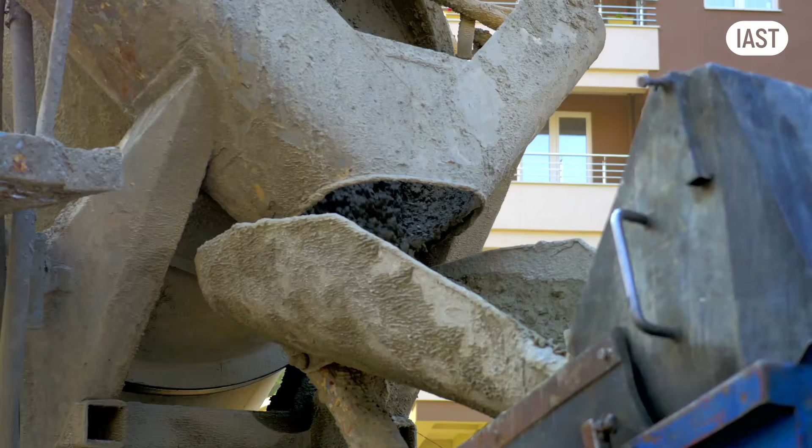What do Sydney Opera House, Soviet apartment blocks and Roman aqueducts have in common? They're all built with a technology that's been forgotten, vilified and reborn more times than any other building material in history. Today we are uncovering the remarkable story of precast concrete facades, a tale of innovation, disaster and ultimate redemption that spans over 2,000 years.

My name is Eugene Korch. I'm a practicing facade engineer and I teach facade engineering at the Institute for Architectural Science and Technology. Today we are diving deep into precast concrete facades, how they have shaped our cities, why they fell from grace, and how they are quietly revolutionizing modern construction.

Our story begins in ancient Rome with Opus Caementicium, the Roman concrete, the world's first hydraulic cement. The Romans didn't just invent concrete, they invented the idea that stone could be artificial, poured into any form and set into something stronger than nature provided. The Pantheon's massive dome stands as proof of concept. Built nearly 2,000 years ago, it demonstrated concrete's structural and sculptural potential. This marked the beginning of concrete's paradoxical history.

The same material would create both the most extravagant architectural forms and the most austere social housing. But here's what's fascinating: despite this early Roman invention, the technology was essentially lost for over 1,000 years.

In 1756, John Smeaton faced a challenge: rebuilding Eddystone lighthouse in conditions where traditional mortar would fail. His solution was hydraulic lime, what we now call Portland cement. This single innovation gave us the most widely used material in the world today.

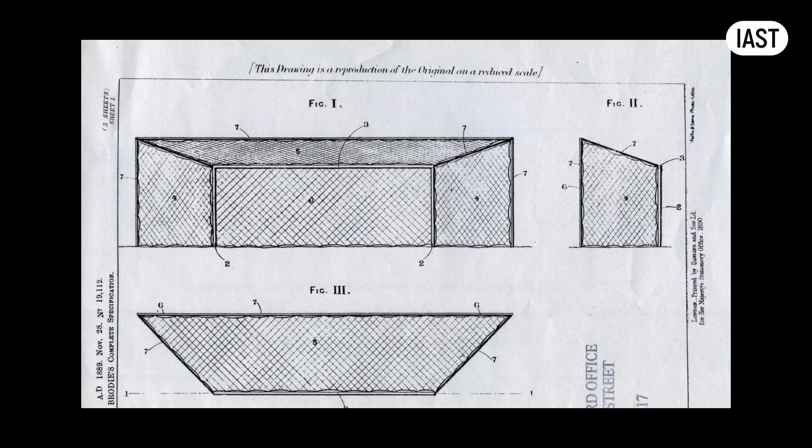In 1905, something remarkable happened in Liverpool. John Alexander Brodie, an engineer who also invented the football net, constructed the Eldon Street apartments using prefabricated concrete slabs. This was one of the first comprehensive precast concrete buildings in history. Think about that for a moment: the same mind that gave us the football net also pioneered industrial housing. Both solutions were so elegant, so obvious in hindsight, that we barely think about them today.

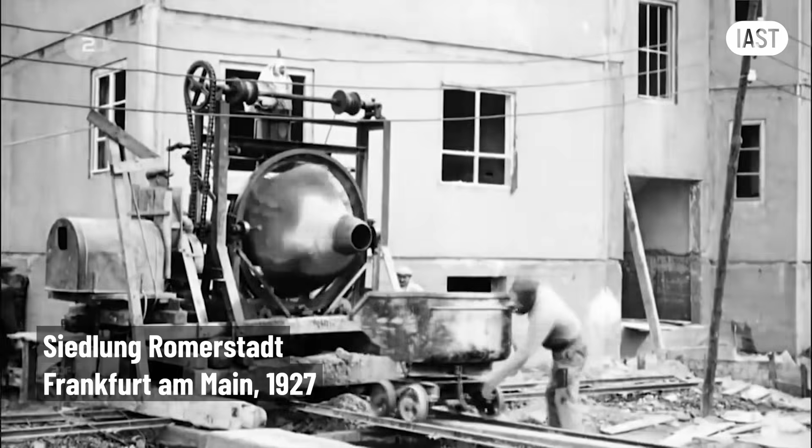Similar buildings began appearing across Western Europe in the 1920s. This footage from Frankfurt am Main in 1927 shows development by German architect Ernst May. Remember this name, we will have to come back to him later. All these early buildings used precast concrete as load-bearing external walls, following thousands of years of construction tradition where facades carried the building weight.

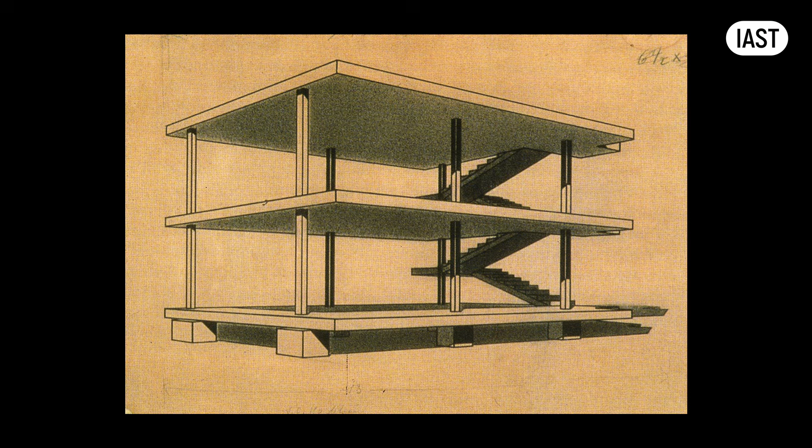Then came World War I, and everything changed. The in-situ reinforced concrete frame revolutionized construction. Suddenly, external walls didn't need to bear loads. They could be light, fast to install and decorative. In-situ concrete seemed quick enough. Curtain walls were the future.

Even modernist pioneers like Walter Gropius and Mies van der Rohe ignored precast entirely. Le Corbusier used precast only as an embellishment, balustrades, solar shading and decorative veneers. He embraced precast as a main material just once, much later in his career.

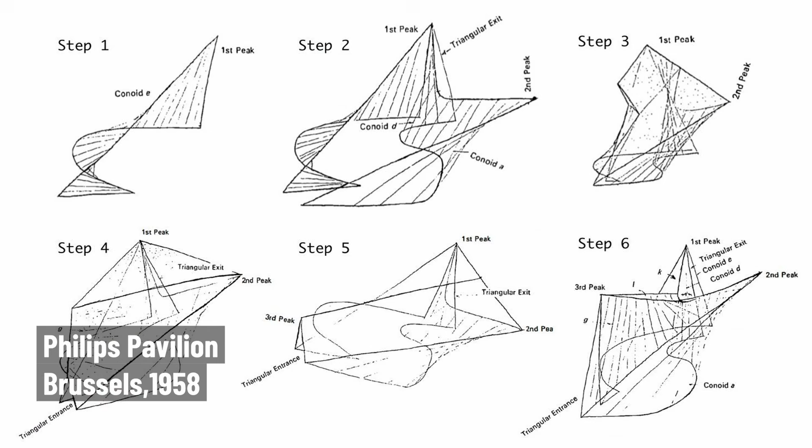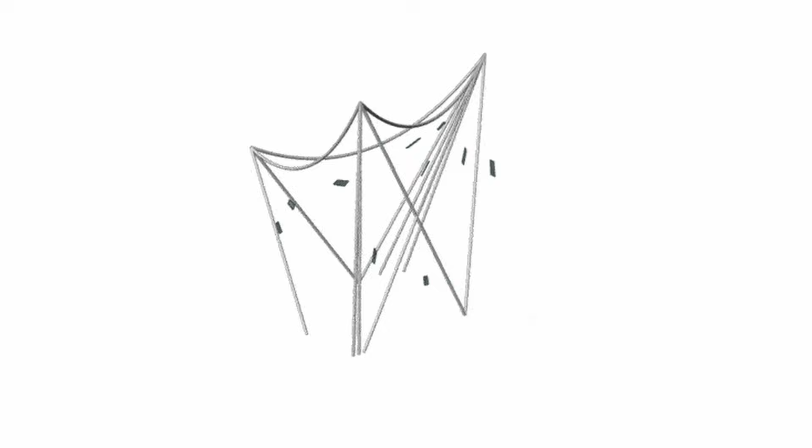The 1958 Philips Pavilion in Brussels, designed with Iannis Xenakis as a system of ruled surfaces creating large irregular geometries from single precast shapes. This pavilion's importance cannot be overstated. Built over 50 years before architectural computer-aided design or CAD, decades before parametric design tools, it achieved what we'd now call computational architecture using pure geometric thinking.

Ironically, the same year saw another precast revolution. In 1958, engineer Vitaly Lagutenko completed the first K7 block in the Soviet Union, the iconic Khrushchevka building. Nikita Khrushchev, the First Secretary of the Communist Party, had declared that every Soviet family deserved housing. The construction industry had 7 years to deliver 15 million homes. The challenges were the lack of skilled workers and time, and the solution was industrial-scale precast concrete production.

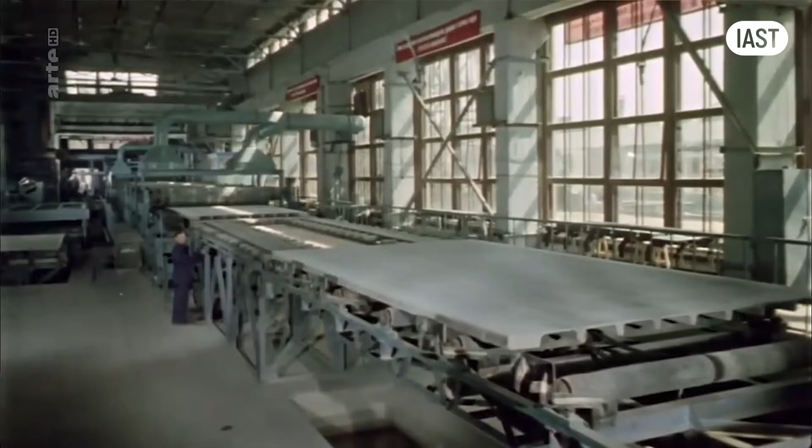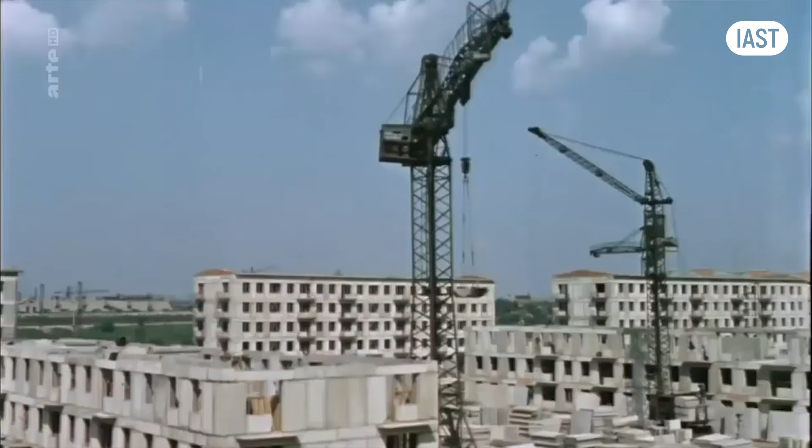Concrete panels shaped like waffles rolled off production lines resembling automotive assembly lines. Entire districts, complete with schools, kindergartens and cinemas, rose from these standardized components. As Khrushchev declared, we are not against beauty, we are against excessiveness. No decoration, no ornament, just pure industrial modernism. These concrete boxes sprouted across the Soviet Union and Eastern Bloc like architectural mushrooms.

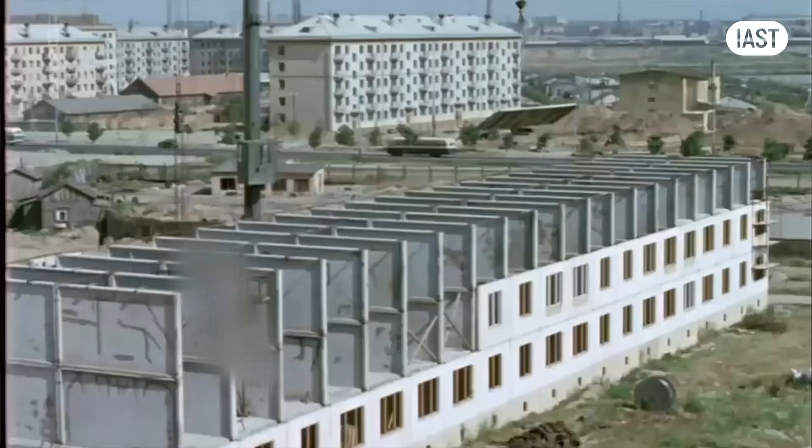The construction speed was breathtaking. Entire 5-story buildings erected in just 1 week, with complete fit-out finished in under a month.

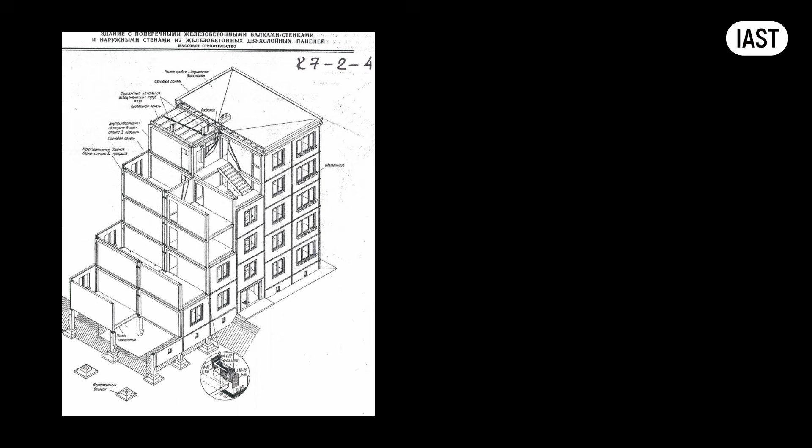When you build that fast, quality inevitably suffers. These buildings had no insulation. With winter temperatures hitting minus 30 degrees Celsius, residents called them concrete refrigerators. Acoustic performance was equally poor. Internal walls were just 60 to 80mm thick, enough for structure and fire safety, but not for privacy. In communist countries, privacy from neighbors or secret services wasn't exactly a priority.

Despite the quality issues, the housing crisis was solved. By the end of the Khrushchev era, 54 million people lived in prefabricated panel buildings. Imagine nearly the whole population of modern UK rehoused within just 11 years and 37 days, and he was still not happy about the speed. Of course, corners were cut.

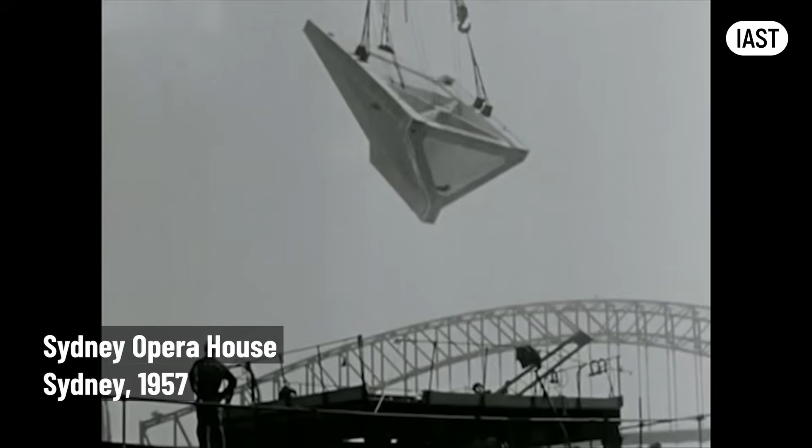Meanwhile, in 1957, Danish architect Jørgen Utzon employed precast concrete panels with cast-in tiles in the Sydney Opera House. Due to the building's complex geometry, and the fact construction began without complete working drawings, the project ran massively over budget and took a decade to complete.

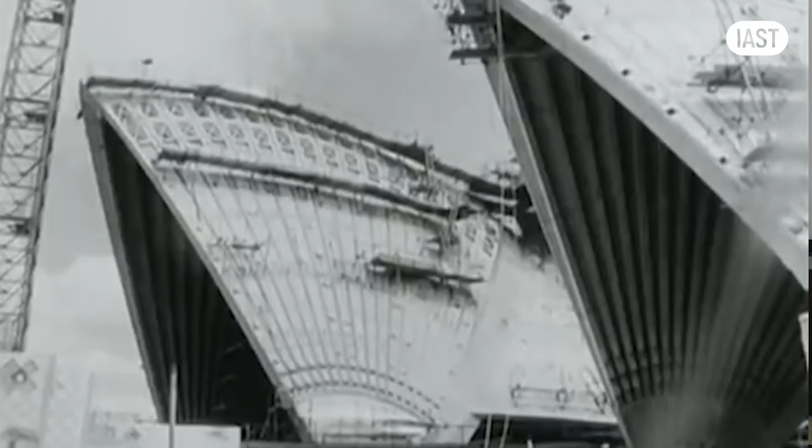Compare this to 15 million Soviet apartments built in the same time frame. Yet the results were stunning, one of the greatest architectural achievements of the modern era. Unlike the deteriorating panel buildings in Eastern Europe, the Opera House still looks modern and relevant today.

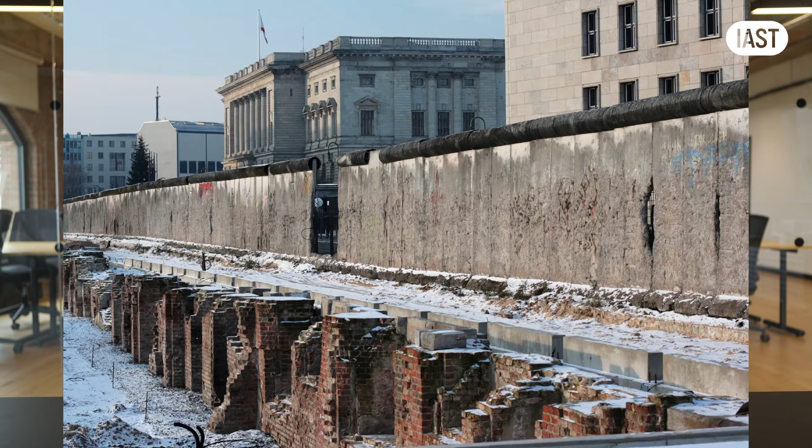Precast concrete became the solution for the housing crisis on both sides of the Iron Curtain. The Berlin Wall itself was largely precast concrete. Entire towns rose from precast panels, Marzahn near Berlin in the east, and Gartenstadt in Bremen in the west, designed by our old friend Ernst May. He would spend the next 2 decades designing thousands of prefabricated apartments in West Germany.

He nearly realized Le Corbusier's vision for Paris in Wiesbaden, proposing to demolish the historic old town and replace it with efficient modernist prefabricated boxes. Fortunately, residents opposed this plan. May believed standardized apartments would create new communities, but neighbors in these buildings rarely knew each other. The anonymity was so complete that these buildings became perfect safe houses for radical terrorist organizations.

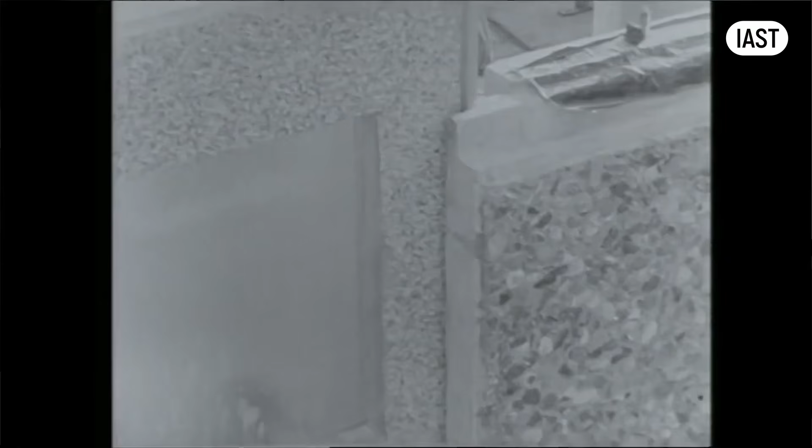Post-war Britain faced its own housing crisis. The government's answer was to increase building productivity through prefabrication. The only answer is more houses. The government are looking to increase the productivity in the building industry.

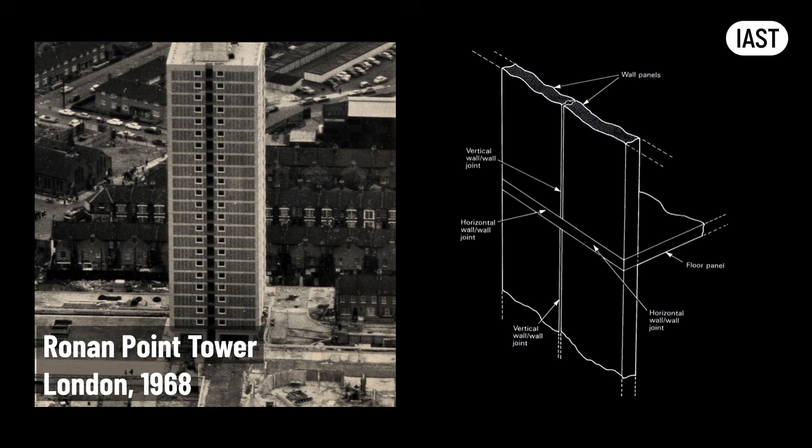Sounds familiar, right? The Ronan Point Tower, using the Large Panel System, or LPS, opened in March 1968. 2 months later, a gas explosion on the 18th floor blew out an external wall. The progressive collapse that followed killed 4 people and injured 17.

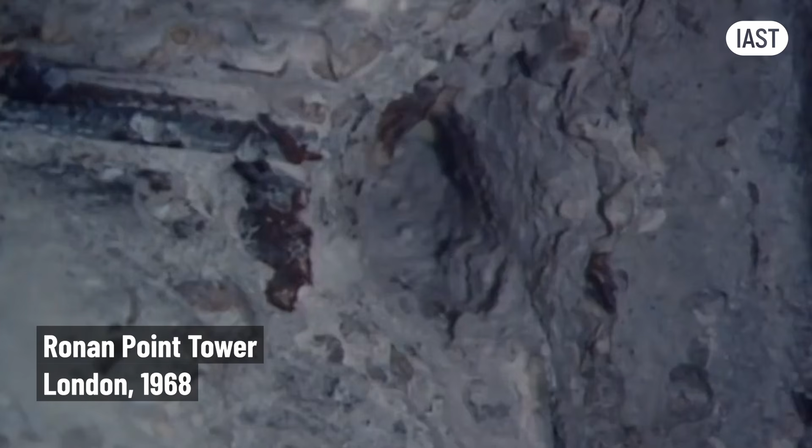An investigation revealed shocking workmanship failures. The engineers hacked back the concrete and found, in flat after flat, that the metal bars meant to hold the panels onto the building were just not there.

What proportion of bolts were missing and what proportion were put in? I would say about 80% were missing and about 20% put in.

Public confidence in load-bearing precast construction was destroyed. One resident's words captured the mood. If they offer you another flat, will you go in one? Oh, no, thank you very much. Anything like that anymore. Not that silly.

No, load-bearing precast was largely abandoned in UK housing, but it would return in a different form, as cladding material. But more on that later.

Early post-war housing prioritized speed and standardization over thermal performance. Those Soviet Khrushchevkas had no insulation, just bare concrete, earning them the nickname concrete refrigerators. By the early 1960s, Scandinavian engineers pioneered insulated sandwich panels. Mineral wool sandwiched between 2 concrete leaves marked a turning point in facade design.

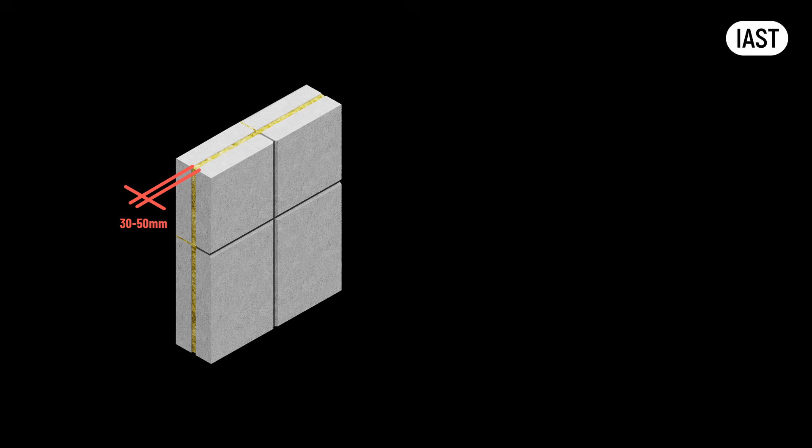The Soviet Union adopted similar approaches with mineral wool or expanded polystyrene. While the insulation thickness remained minimal, often just 30 to 50 millimeters, these early sandwich panels set the stage for modern energy-conscious systems. Today, precast sandwich panels feature minimum 150 millimeter insulation layers between structural and facing walls.

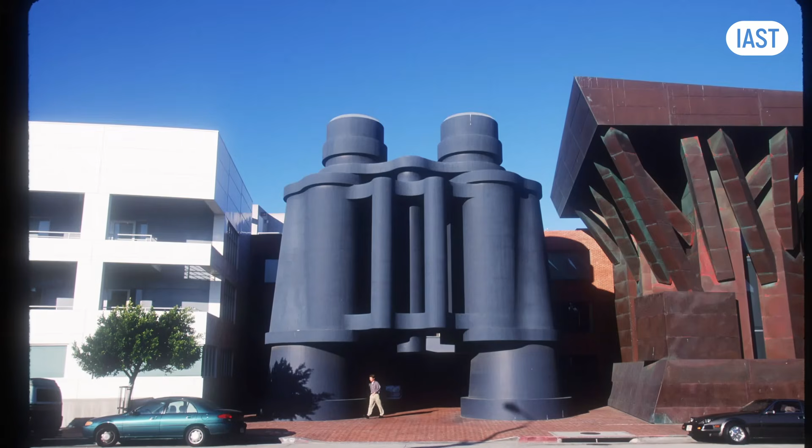The 1980s brought postmodernism. Precast concrete's ability to take any shape made it perfect for outlandish new designs. The best example is Ricardo Bofill's social housing in Paris, using the material associated with brutalism to create something entirely different. But Bofill wasn't using precast for speed or mass production, only for the complex shape it enabled. His buildings used an in-situ concrete structure, with precast panels inserted into frame apertures, creating decorative facades.

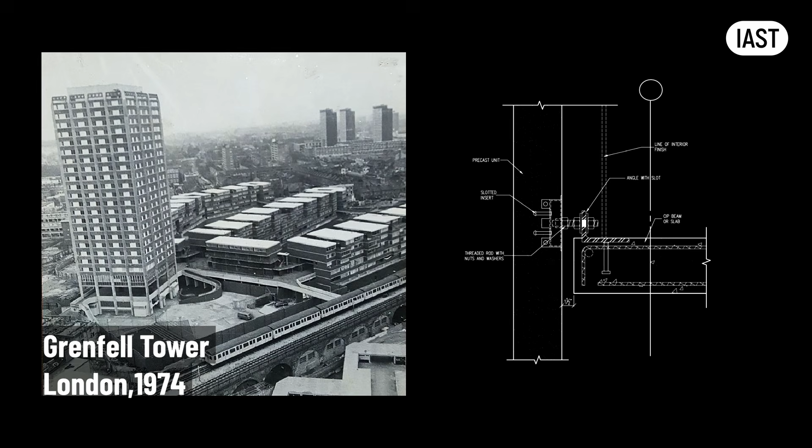This wasn't entirely new. Back in the UK, engineers had developed hybrid systems to address Ronan Point's progressive collapse issues, while offering more generous apartment layouts. The most famous example is Grenfell Tower, built with an in-situ reinforced concrete structure and precast concrete cladding panels.

These panels rested on the in-situ slabs with no thermal breaks. They were purely decorative, uninsulated. Once again, concrete served mainly as decoration.

Both modernist and postmodernist precast developments became associated with failed social programs. Those buildings in Paris became so synonymous with dystopia that they served as backdrops for films like Brazil and The Hunger Games. Low-quality housing made concrete blocks synonymous with mass-produced mediocrity. Exuberant postmodernist ornamentation hardly helped with this reputation.

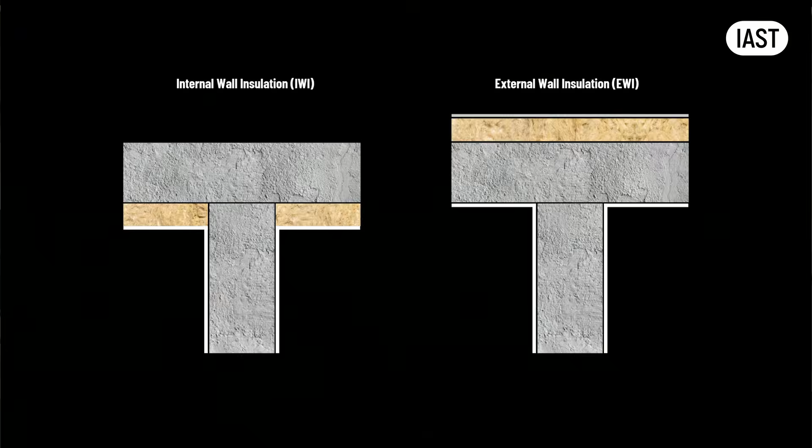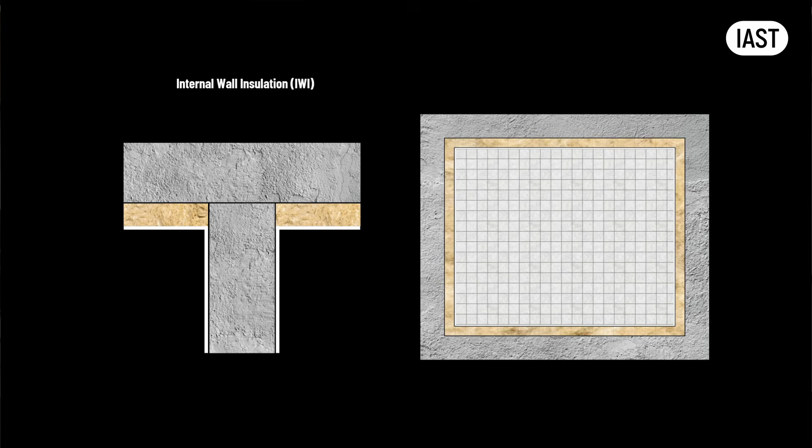When the time came to address thermal performance issues in existing precast buildings, the industry faced two choices: internal or external insulation. Internal insulation would intrude on residents' living space and create interstitial condensation problems. Installing insulation internally without decanting the apartments is hardly possible, and the apartments themselves will end up slightly smaller, as the insulation eats into the existing space.

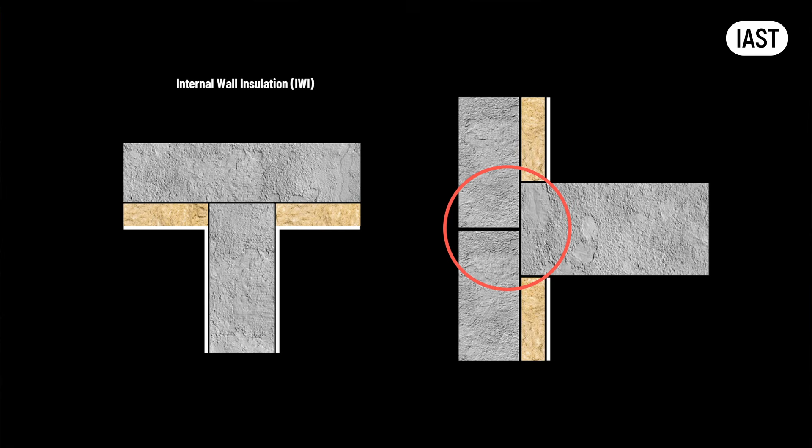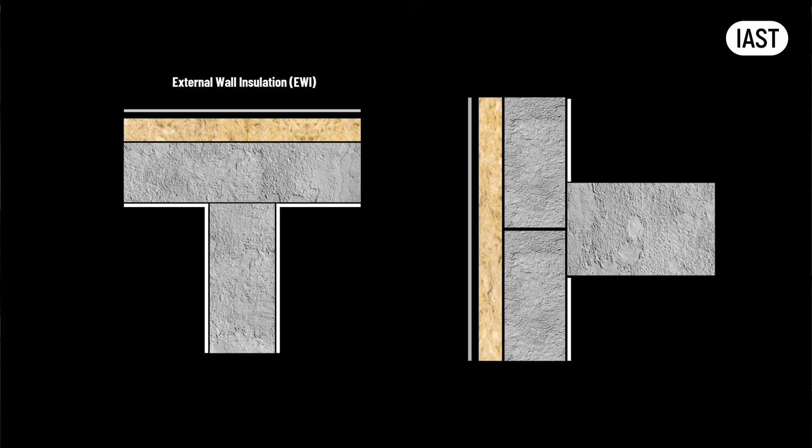Worse still, thermal bridges at the slab-to-panel connections would remain unresolved at these locations. External insulation proved far more effective, wrapping the building in insulation and rain screen cladding with ventilated cavities to manage moisture. It was also less intrusive for residents. As exposed concrete towers fell from grace, architects were happy to cover what many saw as ugly, soulless concrete.

This is exactly what happened at Grenfell Tower from 2014 to 2016. To save money, designers chose combustible aluminium composite cladding, or ACM, insulated with high-performance insulation that was also combustible. Just over a year after completion, 72 people lost their lives in the resulting fire.

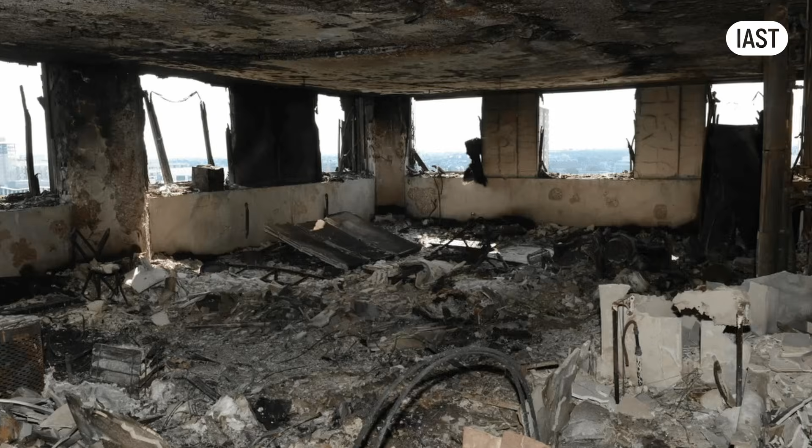The morning after the Grenfell fire, only the precast concrete structure remained intact, stained but undamaged, while the cladding and insulation had completely burned away. The industry was forced to give precast concrete another chance.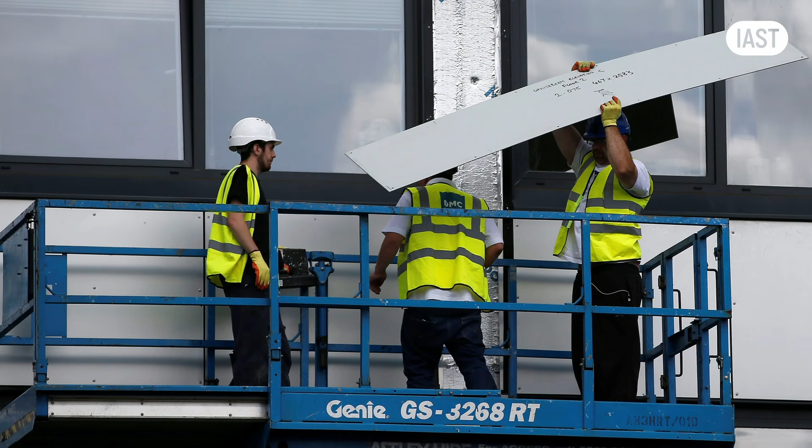The mass housing era seemed over. Residents demanded larger apartments with flexible layouts that exceeded what Khrushchevkas could offer. But developers still wanted prefabrication's speed and cost efficiency. Post-Grenfell, rain-screen facades fell from grace, and metal panel cladding became associated with cheap, low-quality construction.

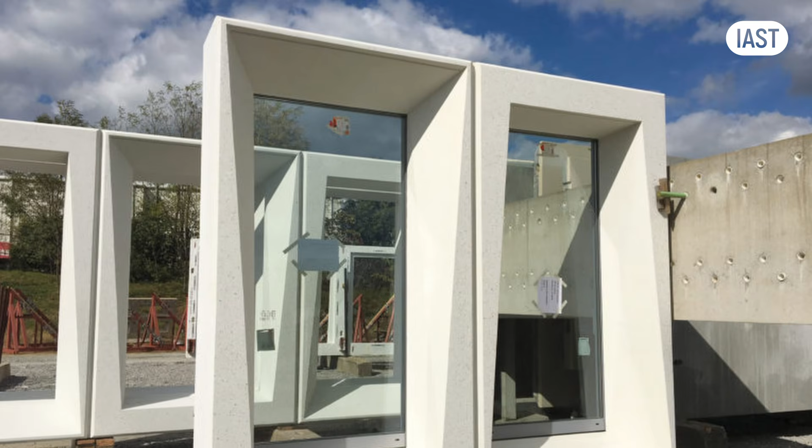Precast concrete facades found new fashion in so-called window panel systems. The primary structure remained in-situ reinforced concrete, but facades are prefabricated off-site with windows pre-installed in the openings and craned into position.

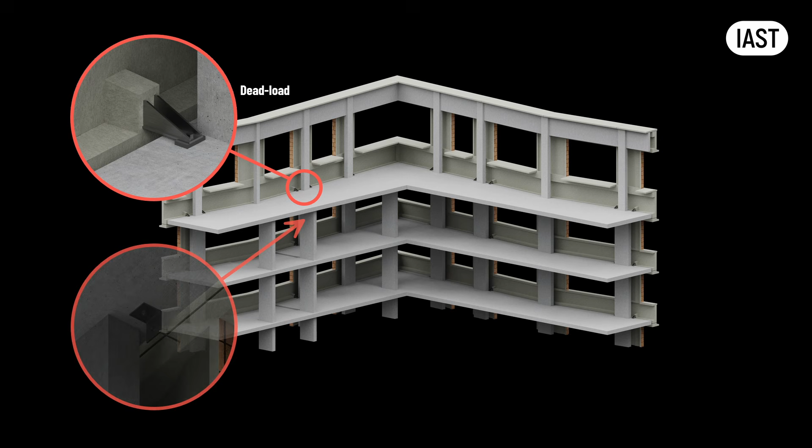This time, panels connected to the slabs through stainless steel brackets or hung from the columns and shear walls. The most common installation strategy is two stainless steel brackets at the bottom of the panel, transferring the dead load to the slab, with two or more lateral brackets with vertical slots at the top of the panel, transferring the wind load back to the slabs or columns, while allowing the panel to accommodate deflection and movement of the primary framework of the building.

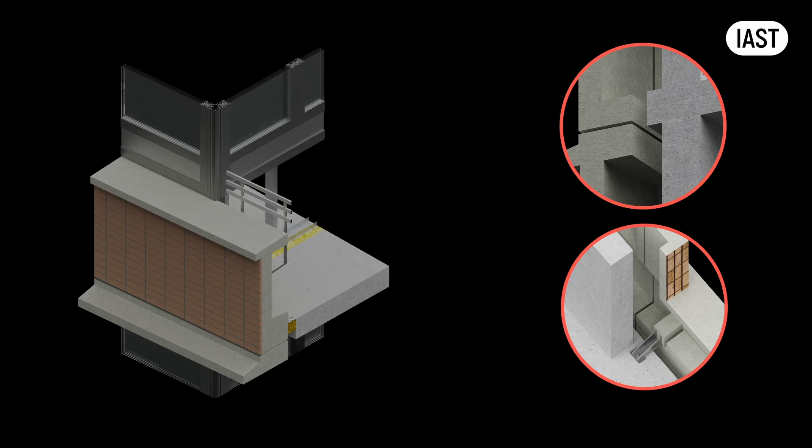Gaps between the slabs and panels serve as thermal breaks, eliminating notorious thermal bridges. The gap between the slab and the panel is also needed for installation tolerances, and is filled with compressed mineral wool fire stops, preventing flame and smoke propagation.

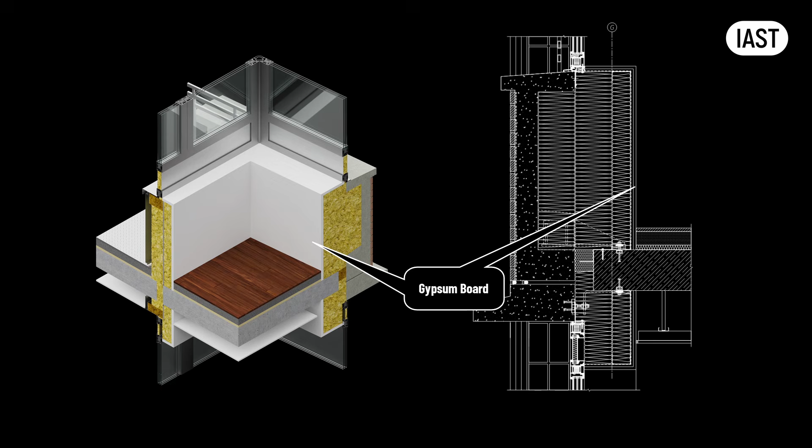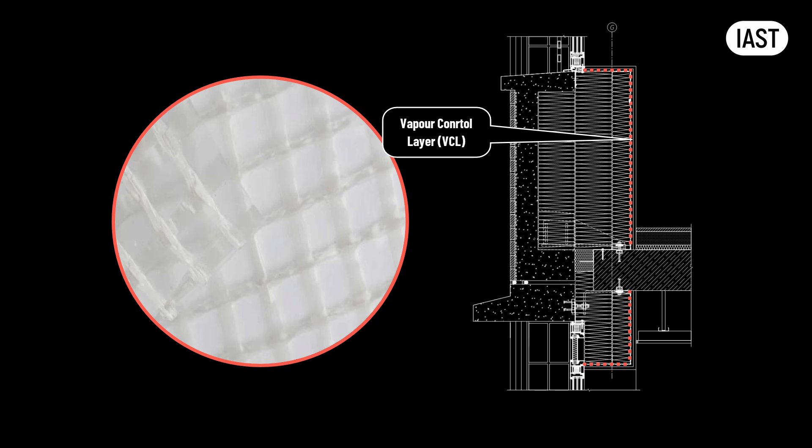Mineral wool insulation is installed behind panels and covered with stud walls and painted gypsum boards. Smart vapor control membranes, positioned between the stud walls and the gypsum boards, respond to relative humidity, normally vapor closed but opening when relative humidity levels rise, allowing trapped vapor to escape. This addressed the interstitial condensation issues that plagued earlier systems.

External concrete panels are at least 150 mm thick, with about 200 mm mineral wool insulation behind them, covered in at least 12 mm gypsum boards. They offer fantastic sound insulation.

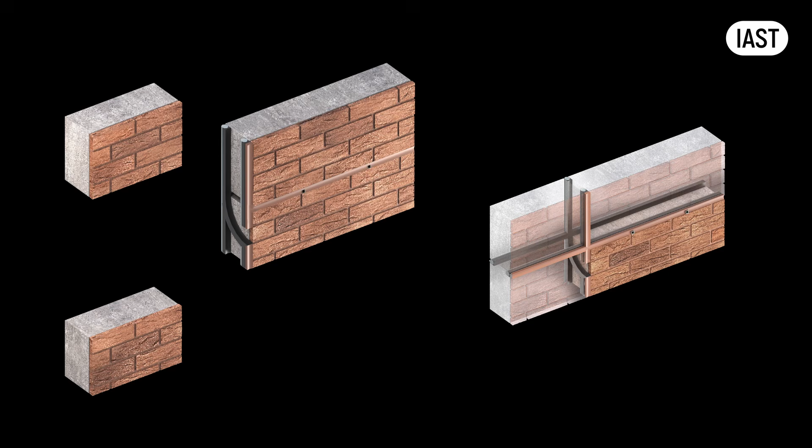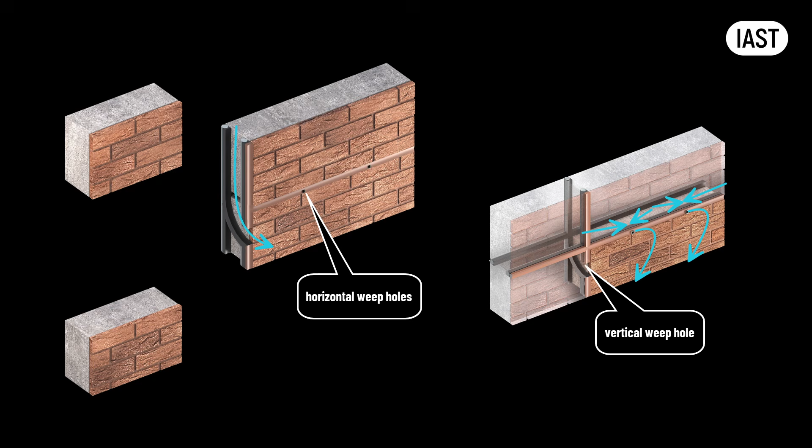The joints between the panels adopt a two-stage seal strategy similar to curtain walls. But unlike curtain wall facades, the seals are executed with silicone rather than rubber gaskets. There are weep holes in the outer silicone seal, either vertical or horizontal, allowing any moisture to escape, with the inner seal serving as the ultimate water and air barrier.

Precast has yet another superpower up its sleeve, which enabled its widespread adoption in recent decades: other materials can be cast into its surface. With skilled labor shortages now critical, precast concrete addresses this challenge elegantly.

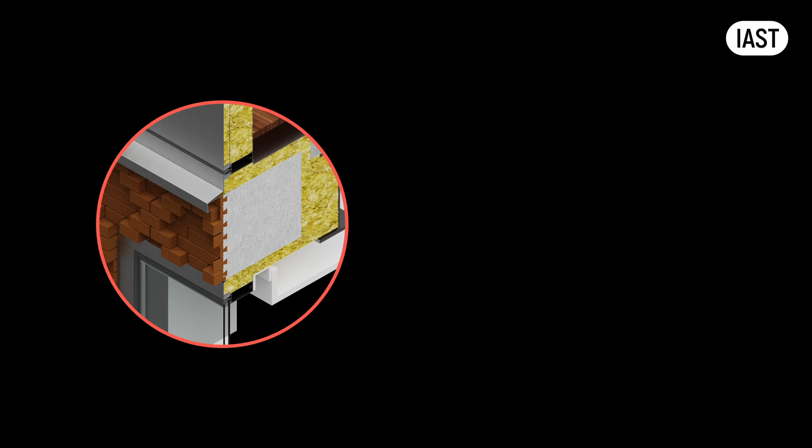Thin brick slips with dovetail keys at the back can be cast into panel surfaces off-site, enabling high-rise brick buildings at speed and cost impossible with traditional masonry. This method also liberates designers from traditional brick bonding constraints. Since bricks aren't stacked but cast into surfaces, virtually any pattern becomes possible at no additional cost.

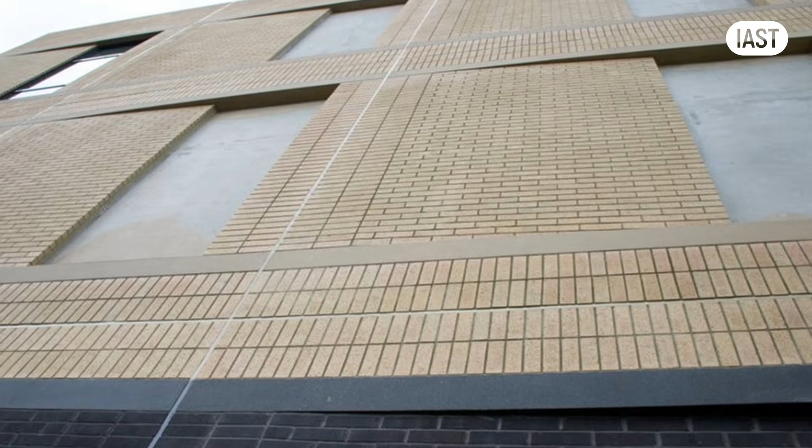Stone and terracotta are equally popular choices, creating buildings that appear traditionally crafted while being industrially produced. The only giveaway of these facades' panelized nature are the joints between panels. These panels reach up to 12 meters in length and at least 1 floor in height, only limited by the size of the lorry or truck that can deliver them to site.

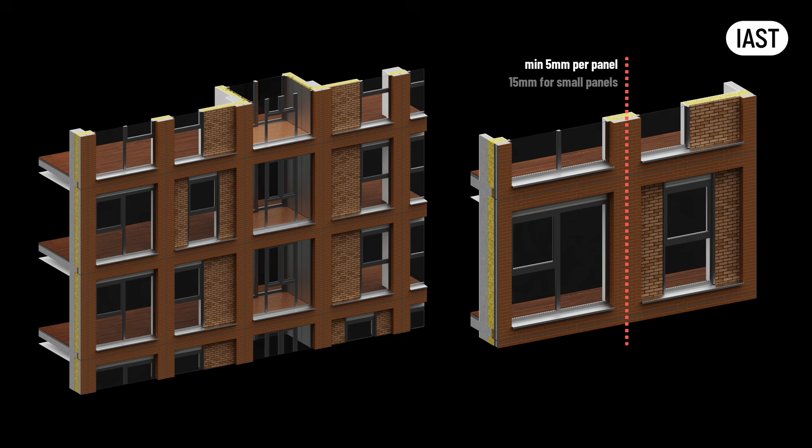Precast panels achieve high prefabrication tolerances but still require a minimum of 5 mm tolerance per panel. And just like curtain walls or unitized facades, these panels have to accommodate building movement and slab deflection. Combined with building movement and installation tolerances, joints are rarely less than 15 mm for smaller panels, with standard precast concrete facade joints being 25 mm between panels.

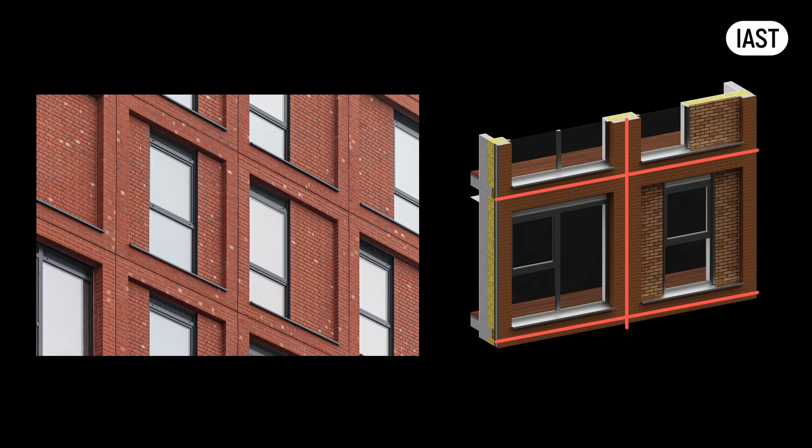These joints remain highly visible next to 10 mm mortar joints between cast-in brick slips, even when silicone color matches mortar, or even if the silicone is dusted with crushed dry mortar. Architects try to design decorative protrusions and recesses next to the joint locations, making them less visible.

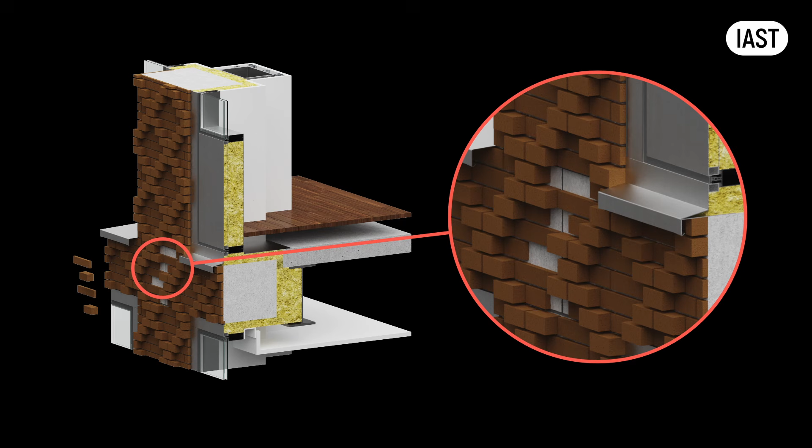More recently, we see engineering solutions where some bricks are left out in the joint locations and later installed in situ once the panels are in place. These brick slips bridge between two panels, completely hiding the joint. However, this only works with smaller panels and requires the highest level of workmanship and engineering, reserved for very expensive,

high-profile projects. Glass fiber reinforced concrete, or GFRC, deserves special mention. With digital parametric tools making complex shapes easy to model, a new architectural style, parametricism, emerged in the early 21st century. Structures like Le Corbusier's 1958 Philips Pavilion became fashionable again.

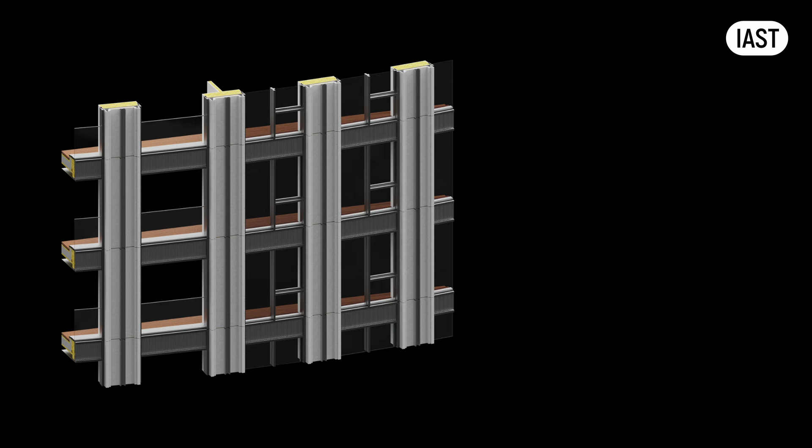Concrete made it possible, but this time the expectations for buildings' envelope performance were higher, not just structurally sound, but thermally efficient and watertight. Rain screen assemblies with insulated and ventilated cavities are perceived to be the best at these tasks. Since these shapes no longer needed to be load-bearing, concrete panels could be as thin as possible.

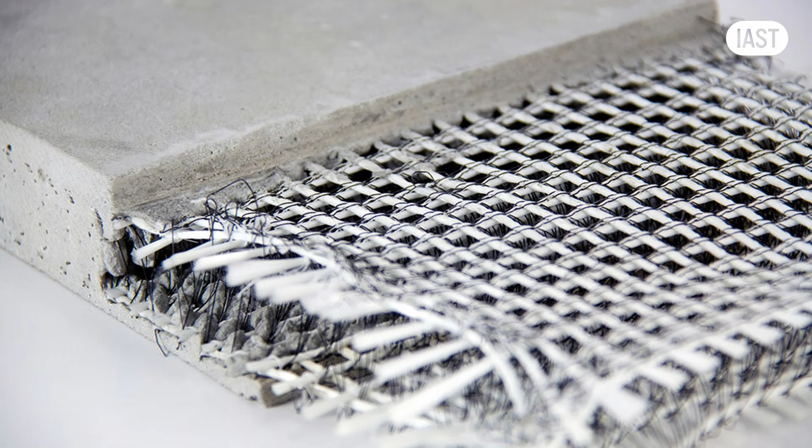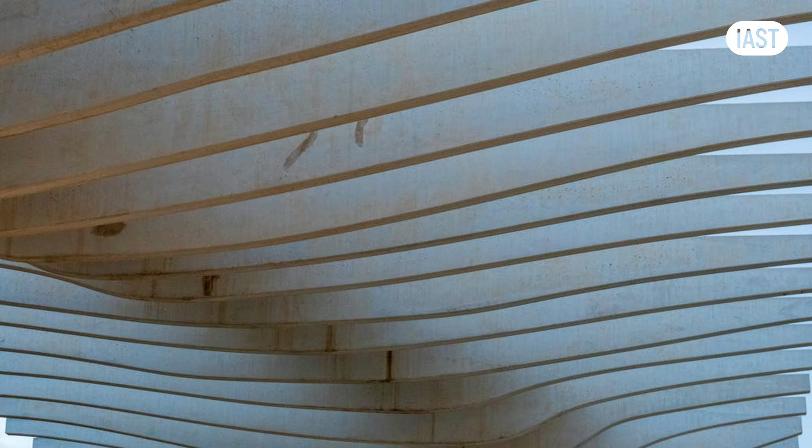GFRC panels, reinforced with glass fibers instead of steel, can be just 1 inch thick while taking any shape. This material appeared on virtually every parametric building in the first 2 decades of this century. Unfortunately, GFRC stains easily, making many of these structures look outdated within a decade of completion.

Today, the world faces another housing crisis. The answer remains the same: build more houses. Some level of prefabrication is expected on virtually all developments, ideally with both structure and facade prefabricated simultaneously. Only one construction type can deliver both: load-bearing precast concrete shell and core systems.

But this time it is different. These structures must solve all previous issues while meeting entirely different quality, performance, and comfort expectations. They're designed for larger apartments with flexible room layouts, utilizing not just panels but precast columns, steel beams, and elaborate transfer structures. Minimum 150 mm insulation separates structural and decorative leaves.

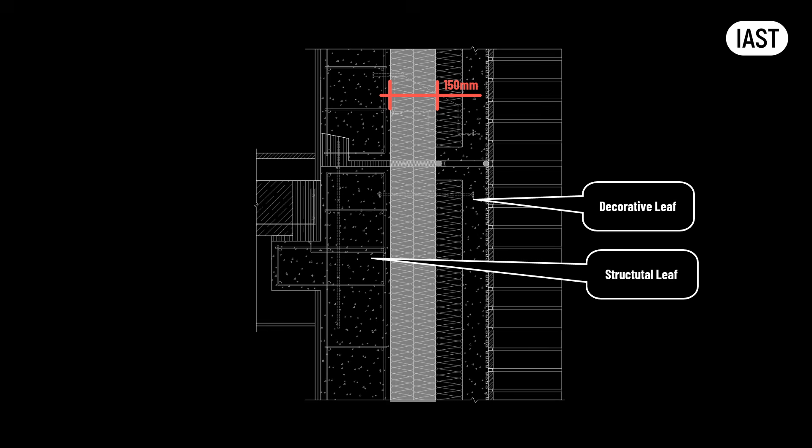Most of the times, insulation is even thicker. These precast concrete sandwich panels offer the best acoustic performance due to the sheer mass of both concrete leaves, further enhanced by a layer of mineral wool insulation between them.

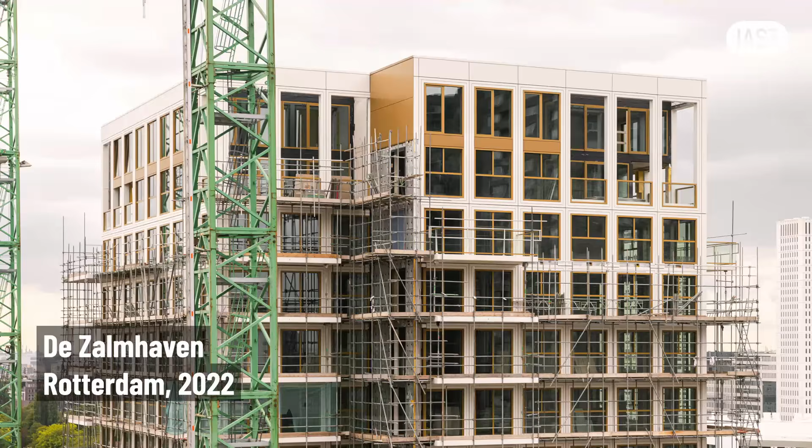Connections between panels and slabs prevent progressive collapse. If one panel fails, the rest remain in place. The world's tallest prefabricated structure is built that way. This breed of structure and facade evolved so much you can't even tell that this is a precast concrete panel building.

The outer concrete leaf can be covered in brick, stone, or terracotta. Not only can finishes be cast in these panels, balconies can be attached through brackets cast into the panels off-site. Entire neighborhoods use these systems in London and Northern Europe.

The most famous is City Island development in Canning Town in London. An entire town built on an island with thousands of homes in blocks ranging from 8 to 26 stories, all constructed in less than 10 years.

No one realizes these are precast concrete buildings. They all appear to be brick structures with balconies and large windows. No other material or system can achieve these results at that speed.

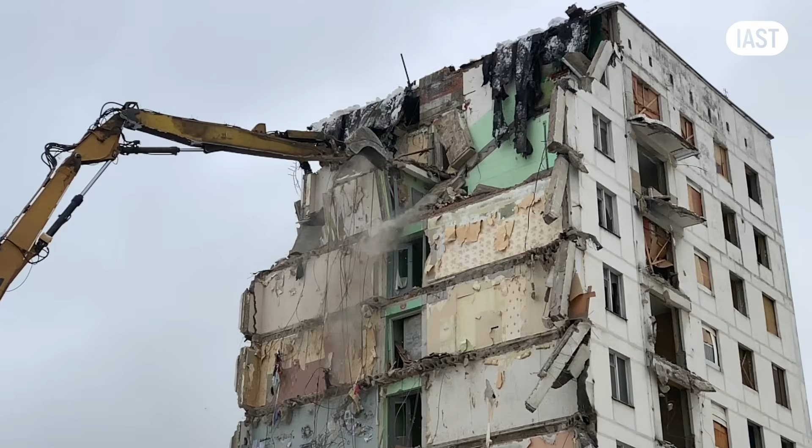One challenge remains for concrete: carbon footprint. Concrete is unfortunately the least carbon efficient material, requiring more innovation. Perhaps hybrid approaches will provide solutions: cross-laminated timber as partitions or slab infills, or advancement in aggregate technology. This is an engineering problem left for precast concrete to solve.

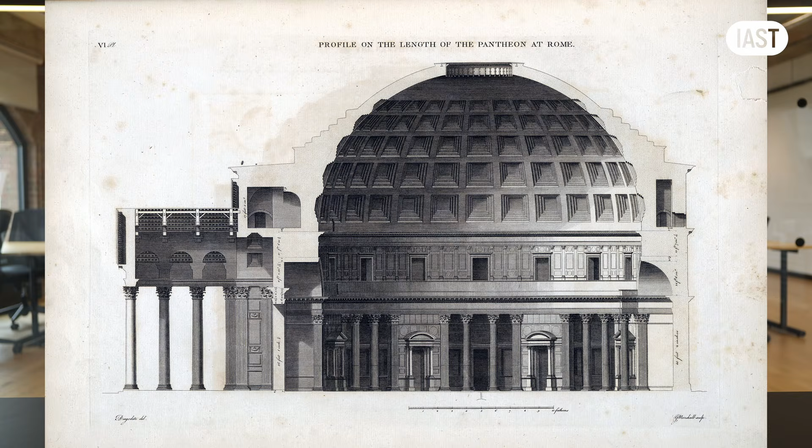From Roman temples to Soviet housing blocks, from architectural disasters to modern redemption, precast concrete facades tell a story of human ingenuity adapting to changing needs.

Today, as we face new housing crisis and sustainability challenges, precast concrete continues evolving, hiding in plain sight behind brick veneers, enabling architects' ambitions and quietly revolutionizing how we build. The next time you see a high-rise brick building rising faster than seems possible, remember, you're probably watching the latest chapter in the 2,000-year story of innovation.